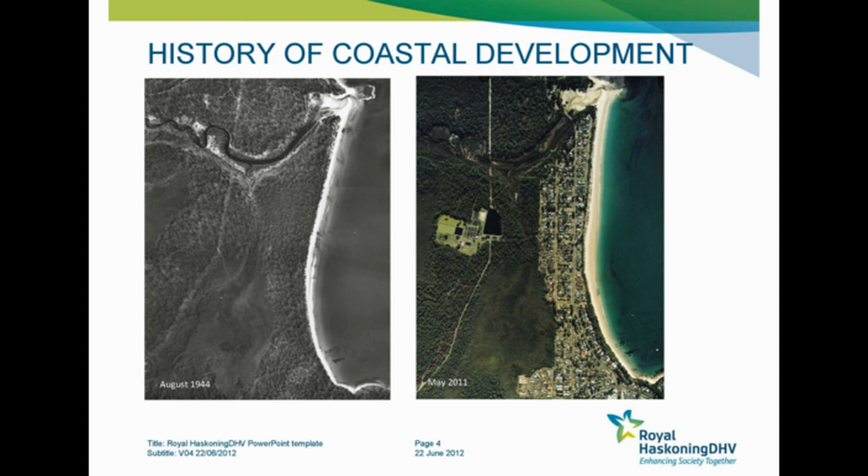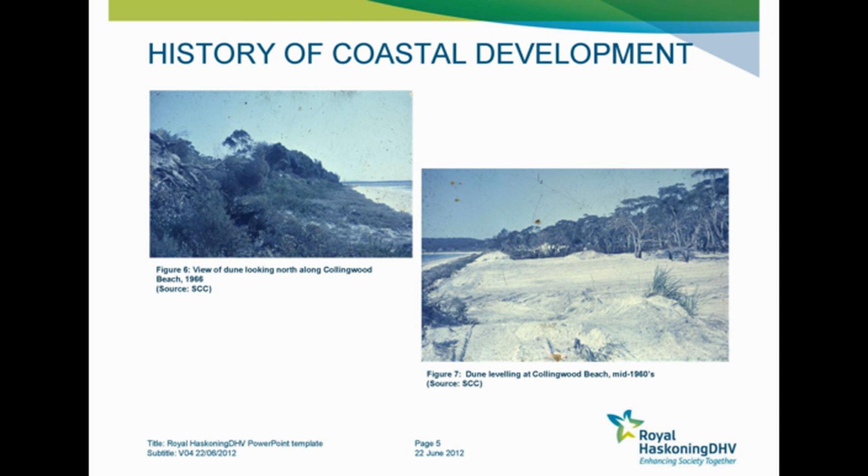Some of the early shots from the community that have been passed on, a view looking north along Collingwood Beach, and just a view of the levelling of the dunes. That was a subdivision going in about 50 years ago. The levelling of the dunes is of particular interest because the dunes really are part of the beach system, as we all know, and levelling dunes, building on dunes, there's little surprise the beach might want to get back into those dunes during storm activity.

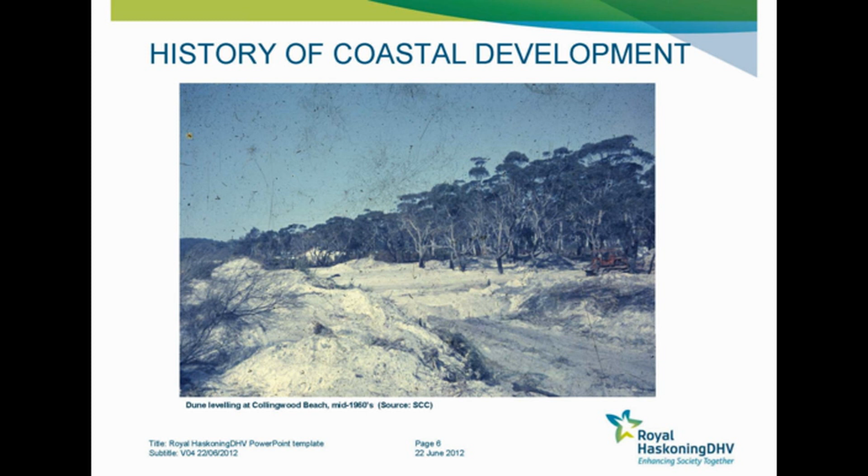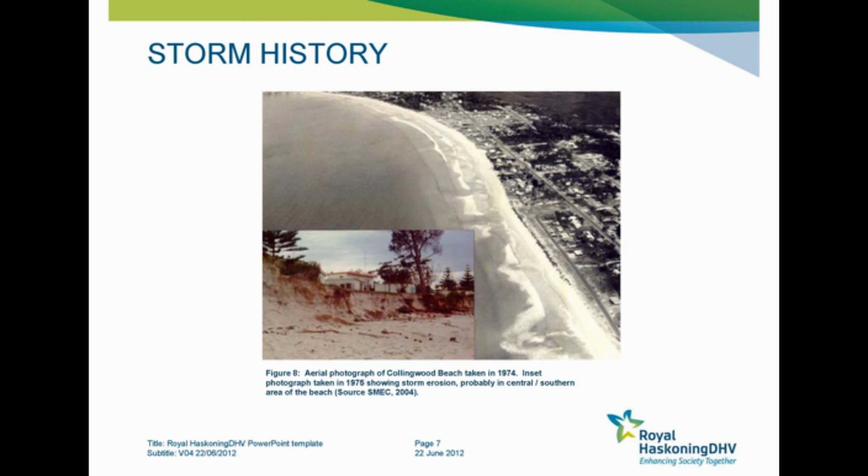Some of the storm history - a photograph that's been reflected in a few of Council's documents. 1974 storms: the inset photo was taken in '75, so that's a '74 shot of the beach and '75 of the erosion, probably in the central and southern areas of the beach, and that was in an early SMEC draft. Another early shot, Davies 1982, storm damage at the southern end of Collingwood Beach. 1977 - there were decent storms in '74, and then '77, '78 - it's fair to say since the mid-80s or so storms have been quite muted.

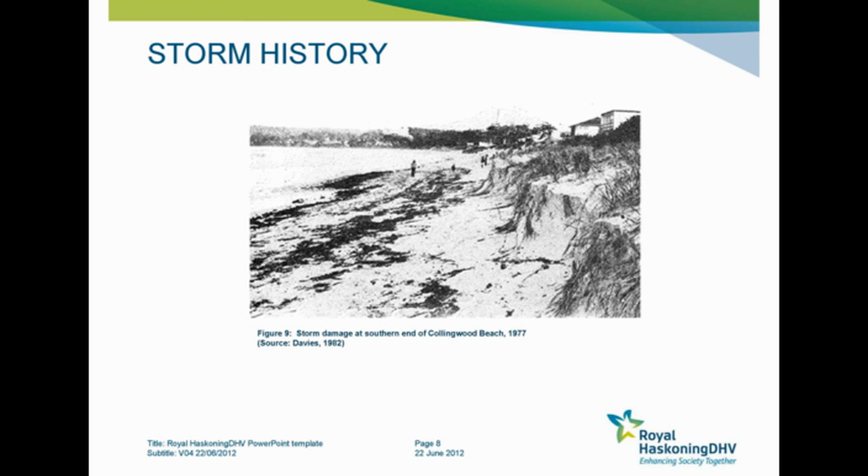A little bit about the Coastal Zone Management Plan investigations. The main ones I'll refer to are the SMEC work done in the mid-2000s, and then later in 2009-10, after the sea level rise benchmarks were brought in and then also withdrawn, and then I'll talk a little about Umwelt's Coastal Zone Management Plan draft.

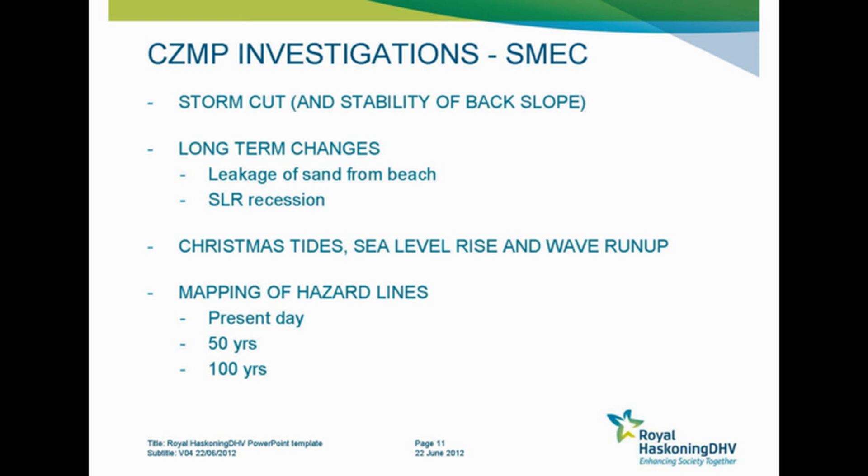What SMEC essentially did was just describe the hazard on the beach, and I'll recap on the work they did in quite simple terms so we can explain what was done. I'll talk to these key points: what a storm cut is and how that differs from long-term changes, talk a little about inundation, what that is, and then the mapping of the hazard lines.

So firstly, storm cut. I really won't be putting up a whole lot of science type slides, but a quick slide. It's of interest to see that there is information on a relationship between return interval, or frequency of occurrence, and wave height.

This is data measured at the Waverider buoy off Port Kembla. For example, what it might say is once every 10 years, we might have a storm which lasts an hour, producing significant wave heights of 7 metres. Once every 10 years, we might have a wave height that lasts for 24 hours of about 5.2 metres.

So if we're looking at a shorter period storm, we can actually get larger wave heights in that storm for given recurrence intervals. It's normally in the 50 to 100 year recurrence intervals that are of interest to us in terms of defining hazard at a beach and also hazard management options. So we're looking at offshore wave heights in the sort of 7 to 8.5 metre range.

What was done previously was some modelling looking at how waves from offshore penetrate into Collingwood Beach. What we've got written on there are the wave transformation coefficients, which is really just the ratio of the wave inshore versus the wave offshore. So at that area, the wave heights would have been about 70% of the wave heights at their offshore point, wherever that was when they did this work.

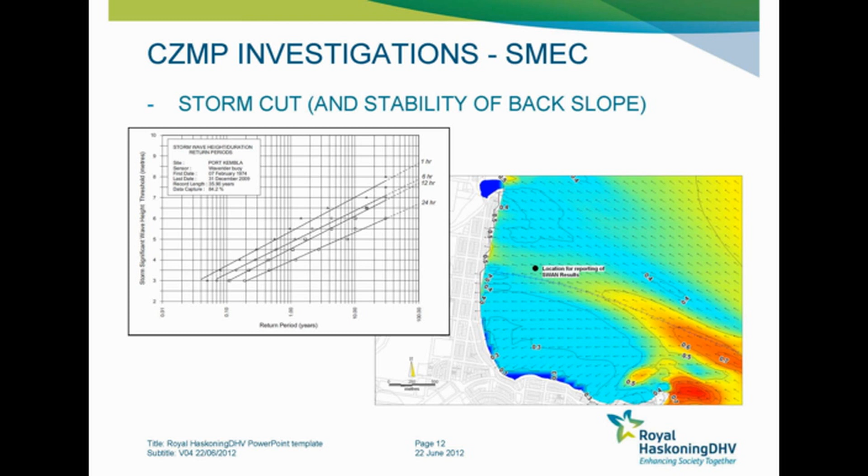If we just have a look at storm cut, what happens in a storm is the beach gets eroded. If we take a slice through that, say that slice was 1 metre wide, travelling along the length of the shoreline, in that slice, in a design storm, it's predicted that 110 cubic metres of material would be in that slice.

Now that is developed from aerial photogrammetry. It's also developed from survey, and calibrated against photographs and also calibrated against some numerical modelling. So the best information we have at this point is that a design storm, a 100-year storm, could potentially erode 110 cubic metres per metre from the beach.

What's also of interest is the slope at the back of that cut, because that affects the stability of the ground immediately behind that, and also that translates to the stability of the foundations further landward.

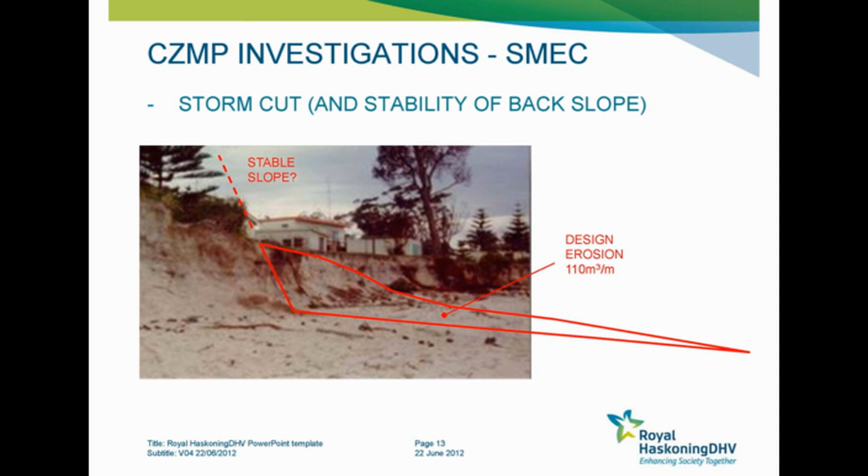I'll just run through a small animation here to help us understand that. This is a situation perhaps before a storm happens. We might then have a storm where the water level gets up, it's high tide, there's wave penetration to the site as per that earlier slide that I showed. And then what happens is, like that last slide, we might get some erosion happening at the beach.

When that erosion happens, you actually get a very steep face at the back of the beach, vertical or subvertical, and it's this area here that might be around about 110 cubic metres per metre. That 110 is actually measured above mean sea level, so wherever mean sea level is, that's a measure of that cut.

Then the storm withdraws and the backscarp dries out. And when the backscarp dries out, it flattens. It's not stable there. If you go to the beach and the tide washes up, you dig a hole. When the sand's wet, you can get a nice steep side to that hole. As soon as it dries out, it wants to flatten out. And that's what that is referring to.

Now, you guys would have seen this wedge failure plane model. It was developed by a colleague of mine, Lex Nielsen. It's found its way into some of the coastal hazard definition work that's been done for council, and it's also adopted more broadly on the coast by the Office of Environment and Heritage. What it does is it simply relates some of those things I was just explaining to areas behind here that have different factors of safety, and I'll explain that in a minute.

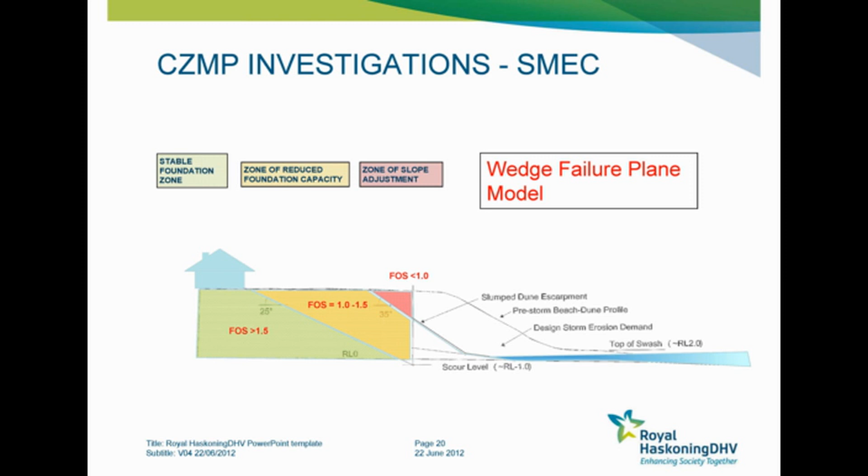If our stabilising forces are 50% more than our activating forces, we're in an area which is, for engineers, considered acceptably stable, and that's in this green zone. So houses there, we'd prefer them to be. Houses over there, we would prefer them not to be. In the middle, also not to be — unless one provides deeper foundations into the stable foundation zone, then that is generally considered to be acceptable.

The lines that Council has mapped are zone of reduced foundation capacity lines. You would have seen that in some of the mapping. That simply is that point there on the model — that's called the zone of reduced foundation capacity. It's been defined as the zone of foundation capacity line on the landward edge of that zone.

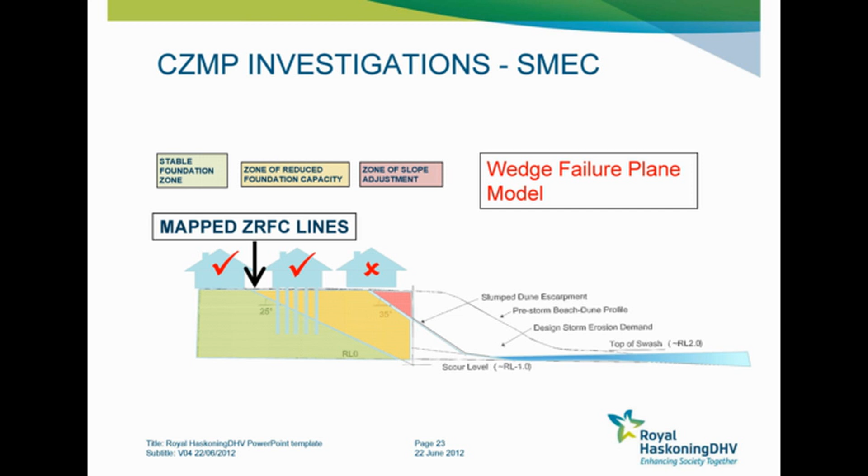Now, after the storm, what happens is we get swell waves, we're back to fair weather conditions, and some sand is brought back onto the beach, and the beach builds up. Now the beach typically, and at Collingwood to some extent, doesn't quite build up to where it was before. There's a small leakage of sand, and that leakage contributes to what's called budget recession.

In a plain sense, what budget recession actually means is that sand, which was eroded from the beach, tends to get lost from the compartment. Some of that sand might move into deeper water, might be sucked out in a rip, and so lost effectively from the system. Some of the sand might move around the headlands, some might be blown on shore, and some might go into, say, Moona Creek. It's fair to say that these losses are quite small at Collingwood.

But just to give you a sense as to what that might mean, over time, as these losses do occur, the profile essentially moves landward to the point where the buffer is reduced. Under sea level rise, in simplistic terms, the buffer is reduced even further. So that there is the concept description of long-term recession due to budget losses and sea level rise.

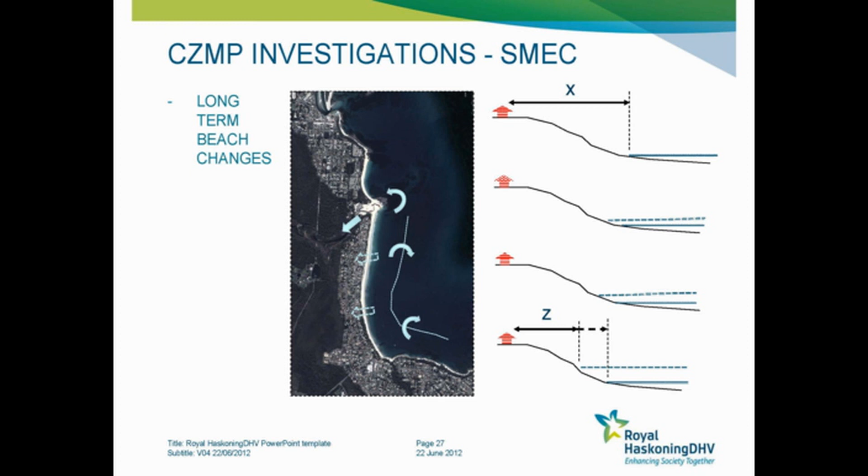If we talk a little bit about inundation, in simple terms, Christmas tides, we all know they get up pretty high. Sea level rise and Christmas tides possibly get up even higher, and that then might lead to, when we have storms, possibly waves overtopping and the water inundating onto coastal property.

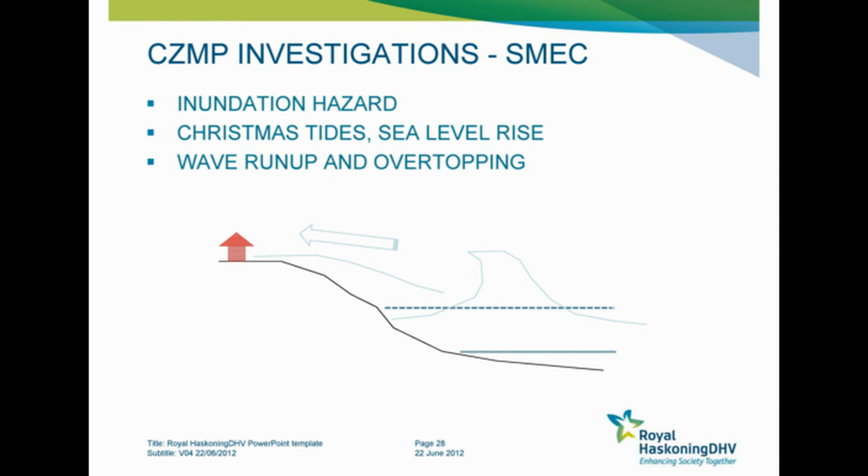That there is a 50-year example. We might have 50 years of recession due to compartment losses and sea level rise effect, erosion from a design storm. Now the design storm is taken to be a 100-year storm, a 100-year recurrence interval storm for all of those particular events. So we take the 110 off, and we go to our map line, which is the orange line.

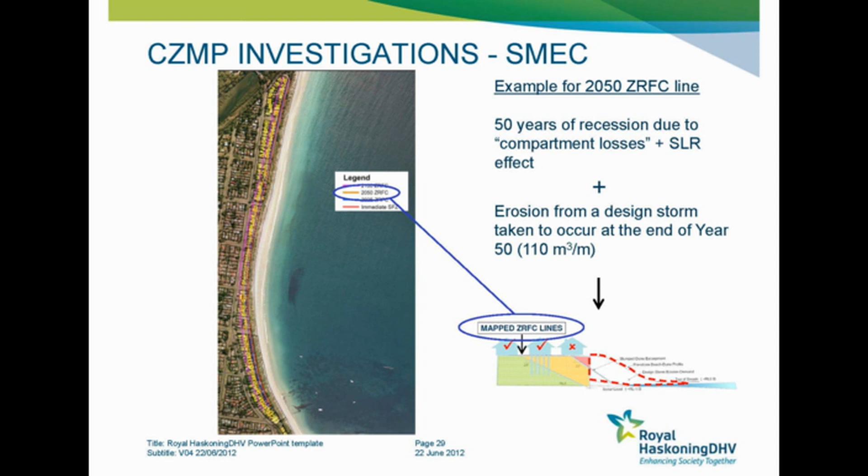Just jumping onto Council's development controls, DCP, interim policy areas of coastal management currently applies and will do so until draft DCP 118 is reviewed and adopted by Council.

In a nutshell, what areas of coastal management tells us is that we have different risk zones which are defined between these zone of reduced foundation capacity lines. The high risk zone is a zone where no new development is permitted, but where minor alterations and fit-outs can occur. The moderate risk zone requires proposals to address standard criteria for coastal instability. So any proposal that's submitted to Council needs to consider those.

If that particular proposal is landward of the 2050 line, generally Council doesn't require any additional coastal engineering investigation. Nonetheless, any buildings in that zone do need to have foundations that penetrate the 2100 zone of reduced foundation capacity line. And by that, all I mean is that your foundations need to get into that green zone.

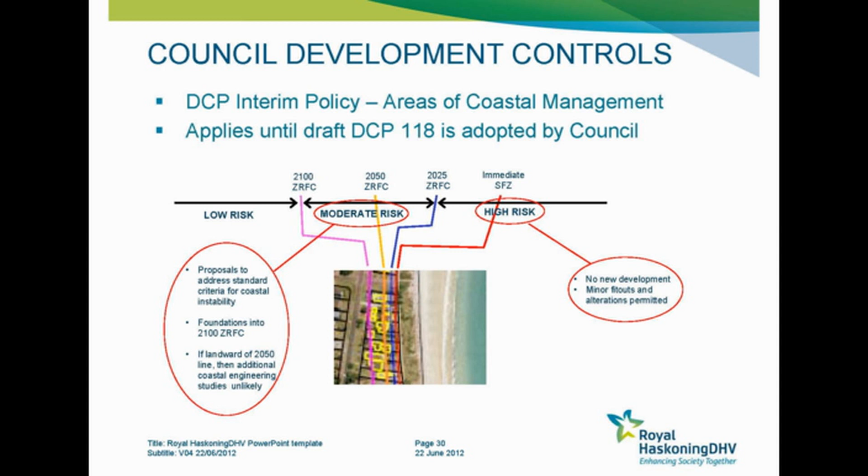So, just recent citywide investigations and work strategies that Council's been busy with. Council has 10 exposed beaches where property is particularly a threat, and they are from Shoalhaven Heads down to Collingwood Beach in the south. Collingwood Beach is but one of the 10 - it's fair to say it's one of the more exposed, but it is but one of 10 beaches that Council is concerned with.

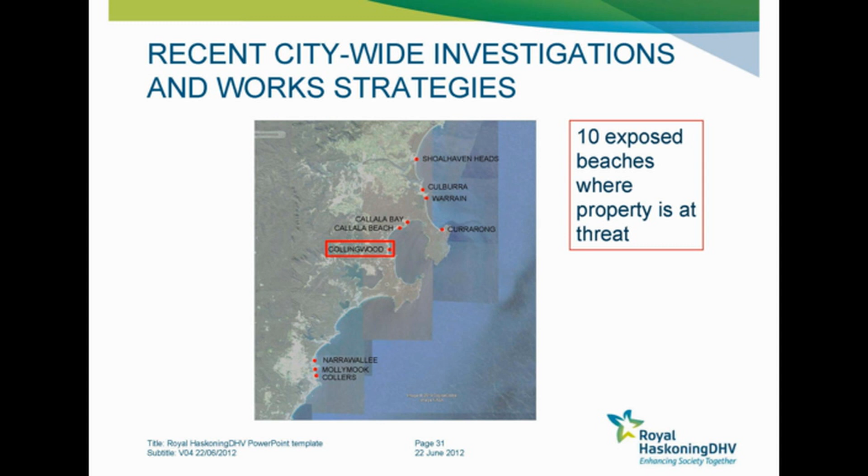The more recent investigations that Council has been busy with on a citywide basis are those asset risk management work done by BMT WBM in 2012, some Sydney Uni work on beach vulnerability, beach scraping advice and application, dredging feasibility work. Spurway and Associates recently produced a final document for Council, and Council is busy at the moment with some sea level rise work on the south coast, trying to understand any regional influences. That's a joint project with Eurobodalla Shire Council. I'll talk about each of those in turn.

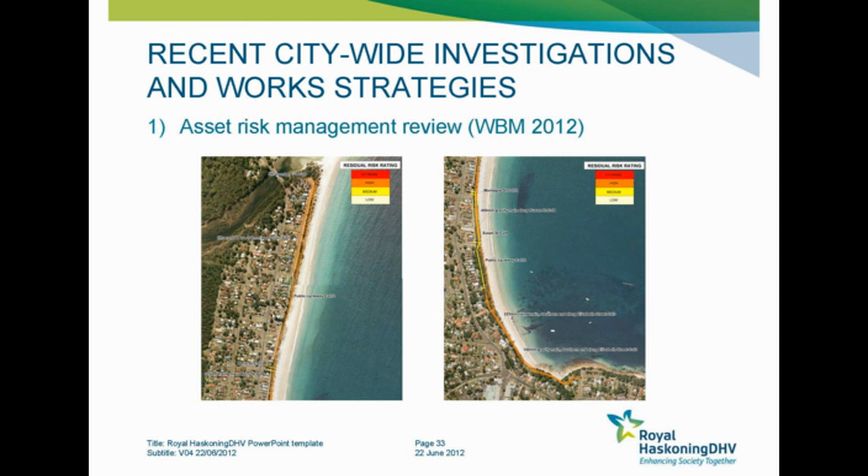Just number one, this was a risk review. It rated low, medium, high level, and extreme risks. Six extreme and high level risk assets were identified for Collingwood Beach: pump station, sewer rising main, cycleway, Ilfracombe Avenue, water supply. Those were assets which were in that high risk and extreme risk category. About $3 million worth of public assets were in that category.

The Sydney University work, this is a little bit more difficult to follow and understand - it's quite esoteric work. It examined the relative vulnerability to sea level rise of, I think it was 8 exposed beaches in the Shoalhaven. Previously we saw 10; I think Narrawallee and Callala Bay were removed from that investigation by Sydney Uni. Vulnerability is a measure of how changes can harm a system, so that's what they were looking at. What they found was that Mollymook and Collingwood were the most vulnerable beaches of all of the beaches in the Shoalhaven.

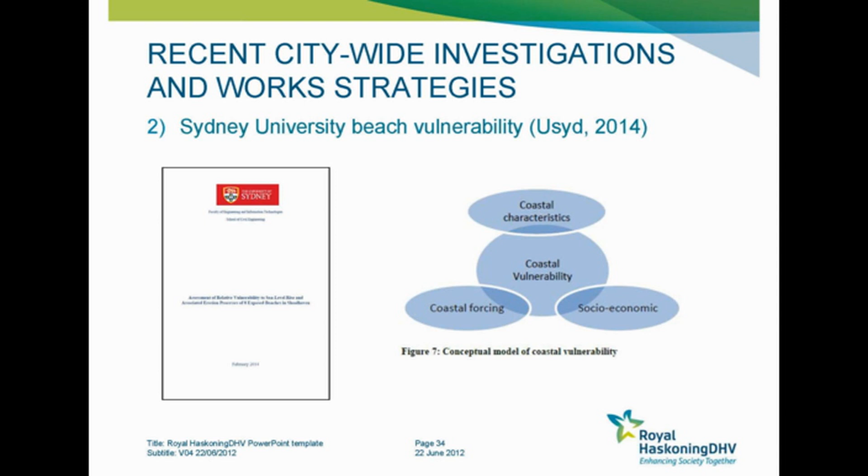Just having a look at some of my notes here on this slide... Collingwood actually was found to have a relatively high adaptive capacity, and by that I think the researchers were saying the age demographic and the income profile of that beach actually meant that residents at that beach were more adaptive and could adapt to a higher extent than perhaps residents at other beaches. I'd really refer you to the report if you wanted to know more about that. Nonetheless, Collingwood was one of the most vulnerable in the Shoalhaven.

Beach scraping advice. What beach scraping is, is a technique for accelerating beach recovery following erosion. It's basically doing what nature would do anyway - it's taking sand which has been washed away from the back of the beach into the swash zone and pushing that sand back to the back of the beach. What it does is it allows the energy of the sea to bring additional sand onshore quicker, which speeds up the rebuilding process. Nonetheless, it's a very short-term benefit. We see it as mainly an amenity benefit rather than a protective benefit.

This is an example of a beach scraping exercise at Callala Bay in 2003. Here's the work done in 2003, implemented there at a cost of around about $150 a metre. Two years later, it's all washed away. So you would say, was that worth it? I'll leave that up to you to decide. I mean, there was clearly an amenity benefit. It was unfortunate that the storm arrived as quickly as it did, so it's certainly not a panacea. It's not going to help protect your property even in a moderate storm. But if you have a hiatus of storms and don't have any, then clearly you've got a better amenity.

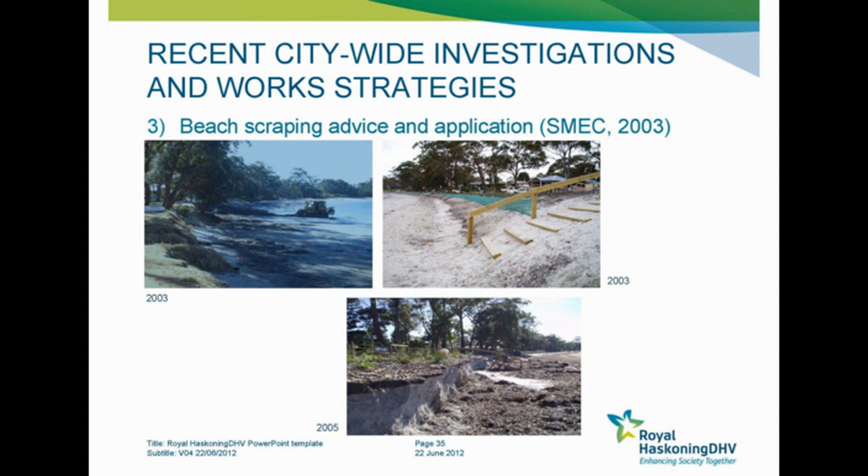Dredging feasibility study by Spurway and Associates. What it did, it looked at strategies to deal with demands for improved navigation - that was the basis of that work. It targeted clean deposits at estuaries, estuary entrances, and also at boat ramps. What it found was that at boat ramps, potentially there could be about 5,000 to 10,000 cubic metres of sand which could be cleared from those boat ramps, and that sand might be available to perhaps do something on beaches to protect beaches.

In a larger sense, say at Lake Conjola, where we have very large entrance shoals, potentially 50 to 70,000 cubic metres of sand might be available there. At Currambene Creek, we might be looking at something in between those numbers. I'd refer you to that report, which is on the website, if you wanted more information.

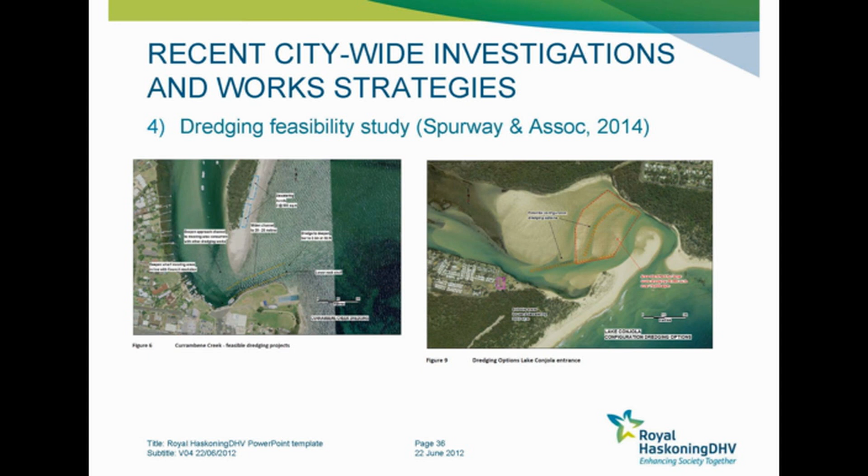The fifth and last study that Council's still busy with is a South Coast Regional Sea Level Rise Planning and Policy Response Framework, that's what it's called, the jargon. It's a joint Shoalhaven-Eurobodalla project, to inform coastal planning within these two LGAs.

And what we can see here is it's been a little bit all over the place, but we see a general trend of increase in water level. And I think what's particularly concerning to scientists is the increasing rate of increase in recent times.

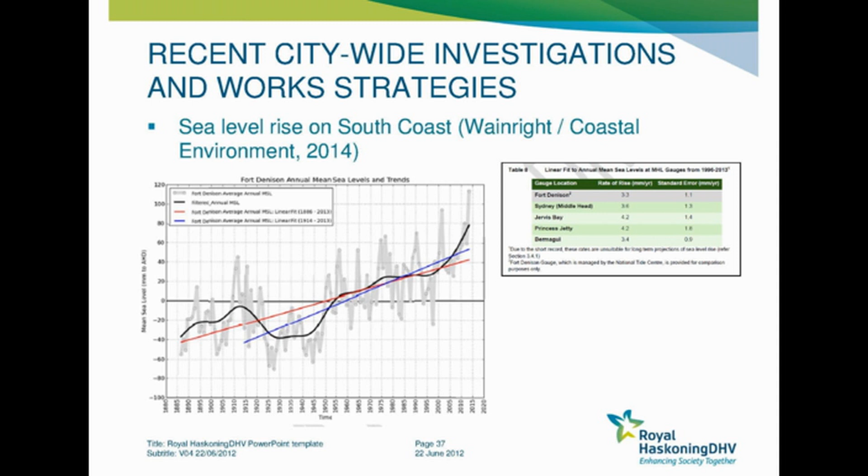What I should also add is that in about 1930 or thereabout, there was a datum shift at Fort Denison, and there's a little bit of uncertainty as to how you compare numbers on this side of 1930 to that side of 1930. But nonetheless, it doesn't affect what we see from there.

Over the last 20 or 30 years, say 20 years, from about 1990, at Fort Denison, water levels have been rising at about 4 millimetres a year. And when we do our coastal hazard assessments now, we actually have to take that 4 millimetres per year into account when we interpret long-term recession.

So that's just data, that's hard facts, what's been measured. The predictions are of more scientific interest at this point, and that is where does this trajectory maybe go from here.

Those there are the benchmarks, which were issued in 2009, I think it was, by the state government. They were then withdrawn on the basis of advice from the chief scientist. Councils, unfortunately, were left with the baby, and they had to make their own decisions. And all the advice that council has been getting to this point is you really can't be moving away from that.

So that's kind of council's bind at the moment. And I think this particular investigation is going to that very thing, trying to understand what is actually happening in a regional sense on the coast here.

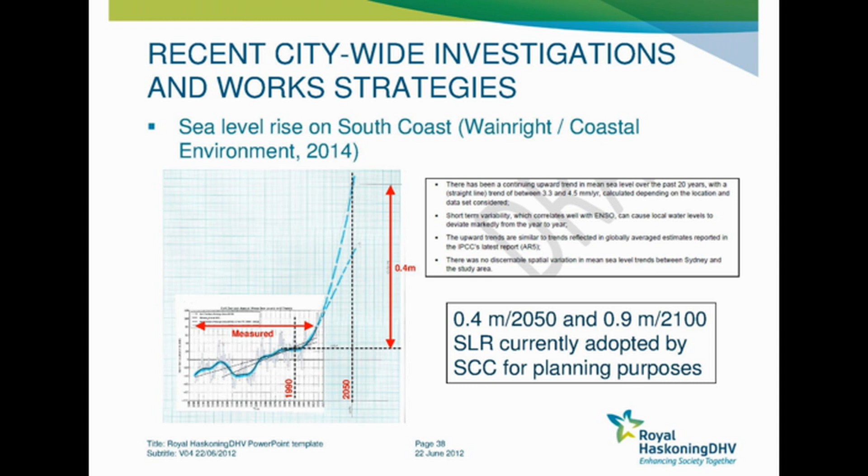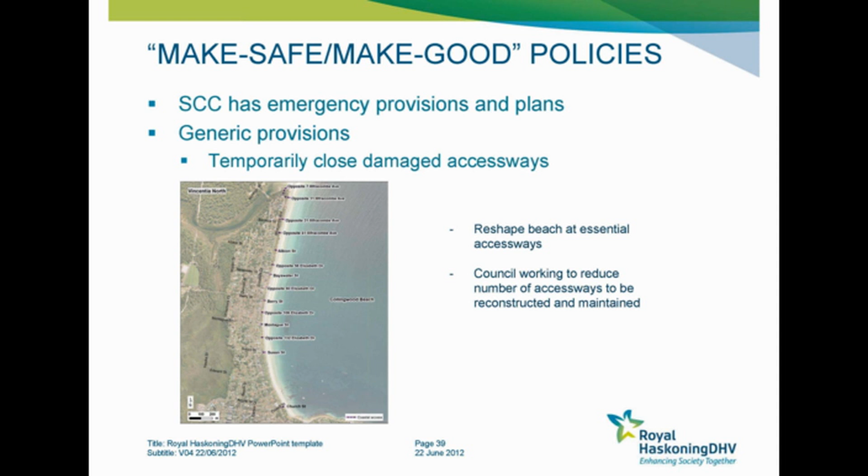Council has in place some emergency provisions and plans. It's got a coastal emergency sub-plan for all of its key beaches, including Collingwood, and they also have an asset management plan for coastal and estuary assets, which is a separate internal document that Council has.

And these plans allow Council to implement these sorts of provisions, to temporarily close damaged access ways, to reshape the beach at essential access ways. And what Council, I think, is wanting to do at a number of its beaches is rationalise the number of access ways that exist, particularly private access ways.

When you've got a private access way that gets damaged in a storm, clearly it's not a high priority access way for Council to go back and reshape. It'll go to the public access ways before it goes to the private access ways. But that, I think, is quite a maintenance bind for Council, which they might want to talk to afterwards.

Some of the other things that Council does in an emergency sense, clearly it's monitoring things and it's implementing beach scraping as necessary.

At Collingwood Beach, SMEC in 2011 identified nearly all beachfront property at the beach as exposed to coastal inundation during a design storm. Now, a design storm, we're talking about a 100-year storm. The last time we had a 100-year storm was in 1974.

Now, you'd say, was that a 100-year storm? Who knows? Maybe it was a 50-year storm. Anyway, it was a very big storm. When we see these red areas versus the green areas, what does that mean? What that means is that these red areas here are predicted to experience overtopping, which is water coming over the dune and possibly washing landward.

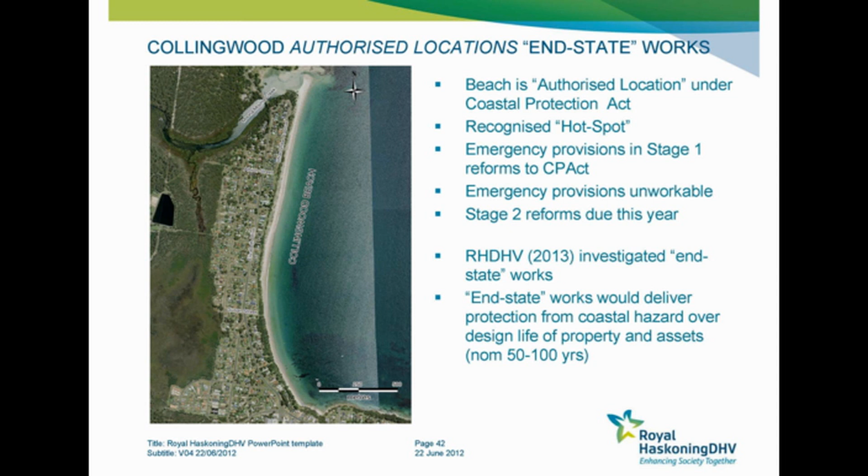We investigated these end-state works in 2013, and as I said, an end-state work is designed to deliver protection from coastal hazards over a 50 to 100 year life, over a property design life, whatever we might want to select for that design life. When we initiated our work, one thing we wanted to do is see if we could find any resistant material to erosion on the beach.

We didn't have an enormous budget. We had to go to 3 beaches. At Collingwood, we picked a couple of locations along the beach and drove in these rods, 4 metres into the sand. At each of the locations that we drove them into, we didn't pull up on anything that we would call erosion-resistant material.

This here is a measure of level in AHD versus the number of hammer blows that you drop onto the top of that rod, and the number of blows to get 100 millimetres of penetration is plotted against level. As the rod actually penetrates the sand, you can see it takes a greater number of blows to get your 100 millimetres of penetration. Numbers of around about 40 blows per 100 millimetres is considered to be refusal, and we weren't getting there clearly.

So we were getting 4 metres of penetration from a spot which might have been just above the water line on the day, without any real sense of resistance. And what that means is that we really need to be treating this whole profile as potentially an erodable profile, based on this limited scope of work.

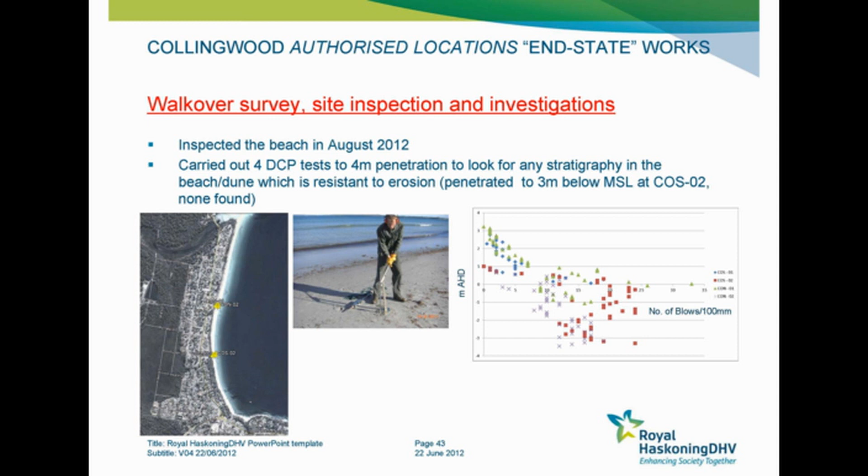I mean, you might want to go over here, you might want to go over here, and it's fair enough that we go all over the beach if we want to firm up on these things.

What we did with our work is we divided the beach into 3 precincts. These were just based on relative exposure, relative risk, and picking key streets to help us with this.

The sea level rise recession effects are based on the best technologies that we have at this point, which is called the Bruun rule, and they're also based on the benchmark numbers, which Council is now going back and having another look at.

Some of the wave run-up levels, 5 to 5.5 metres above Australian height datum. That's pretty close to what you have on top of the dune there now.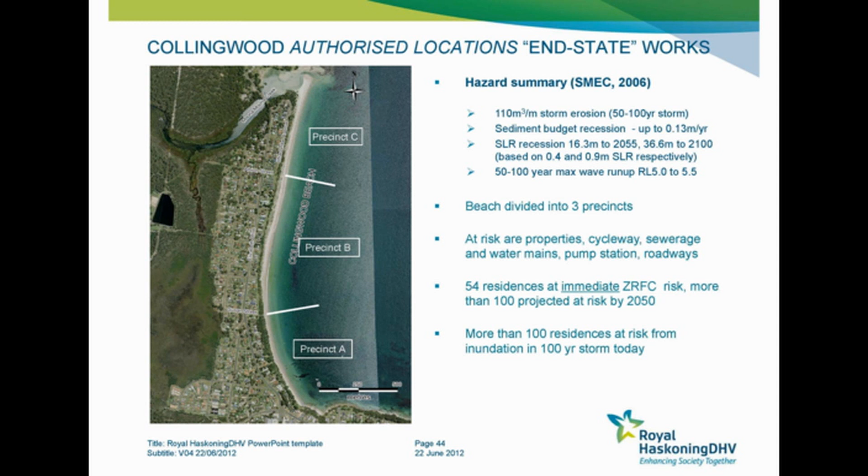So, what can we do to try and mitigate these risks? We looked at revetments, beach nourishment, and also near-shore breakwaters.

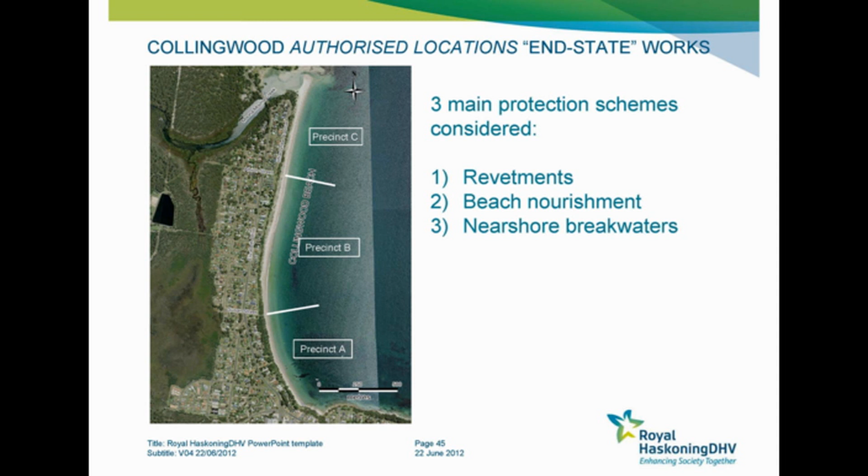What revetments are is they're shore parallel structures. They physically interrupt the wave action. And what they have the effect of doing is they have the effect of moving a hazard line basically to the crest of the revetment. So that's a slice through the beach, through the dune.

We separately looked at those for each precinct, developed that design based on a breaking wave height of 2.3 metres, which we got from the 2006 work.

Concept design involves 1.2 to 2 tonne rock over an underlay. Often you see a bit of a toe in front of these structures because the beach is relatively protected. That's a relatively small breaking wave height. We believe that that might not be needed at this site.

Crest level 4.5 to 5. To build that is about $10,000 per linear metre.

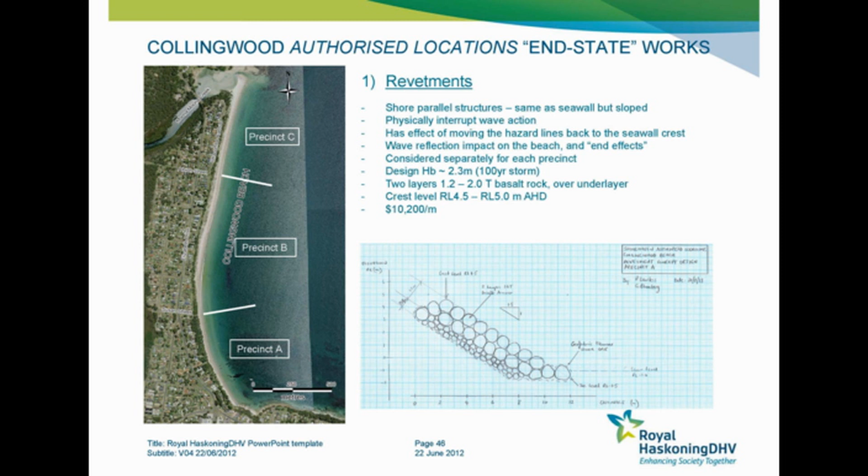Beach nourishment, that's putting new sand on the beach to feed the ongoing erosion. We characterised how much sand might be lost in a storm, how much sand might be lost due to long-term recession.

If you keep putting sand on the beach to feed the recession and feed the storm, essentially you can hold the shoreline in the same position. That's all beach nourishment is. You can imagine that for 50 years of protection, that amounts to a lot of sand. And I'll talk a little bit more about what quantities are involved.

3 nourishment scenarios we looked at. We looked at what we call massive nourishment. Nourishment with the groyne near Susan Street, which allows us to compartmentalise an area of nourishment and not focus on areas which are relatively protected.

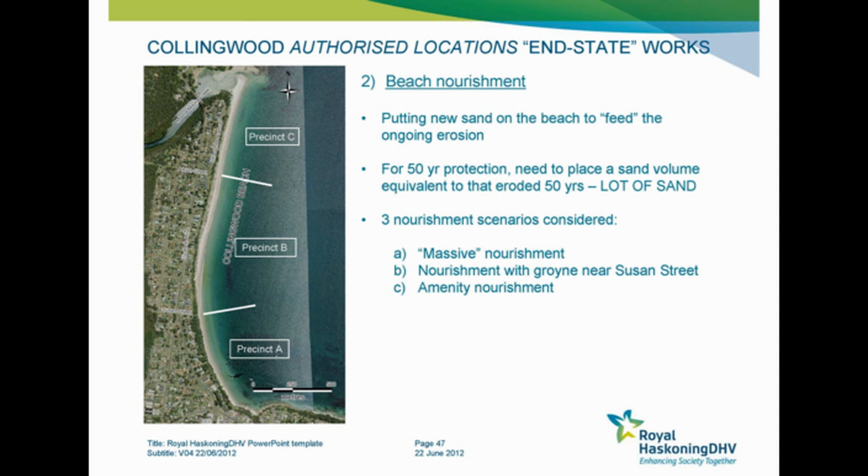And then amenity nourishment, which is basically protecting the beach more so than protecting property, but I'll talk about that as well. So going to massive nourishment.

Massive nourishment does the job of a full-length revetment. It needs an initial placement of sand plus ongoing maintenance placements. And you'll see that we're talking about very large quantities of sand. And it's not just about putting sand on the beach, because if you put sand on the beach, that sand

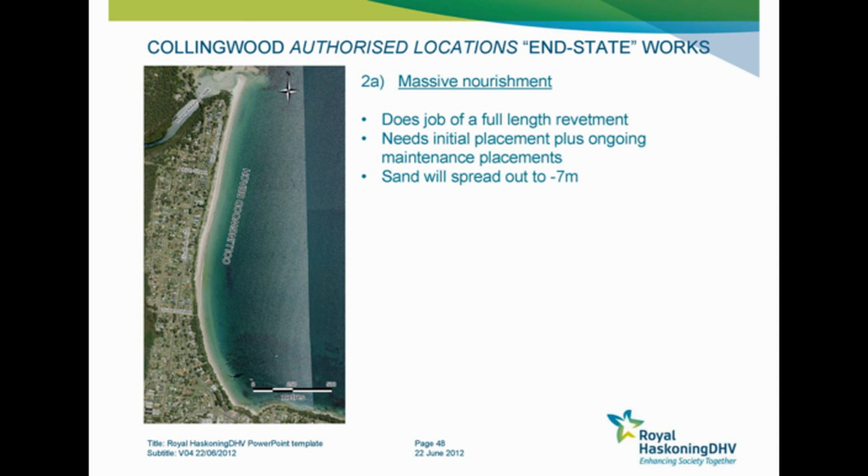very rapidly gets washed into the swash zone and beyond. We need to actually get that sand out to a depth which is called the depth of closure for a beach. And that's characterised here.

So that, if you like, is the compartment within which sediment might move. In effect, the best way to nourish a beach is not just to put sand over there, but put it over the whole profile. Now, what you'll see is that 60% of the sand you need for nourishment is actually underwater, you don't see it. This is the depth that you see.

At Collingwood, a massive nourishment project would require a 10-metre widening of the dune, with sand placed all the way up to -7, and there are techniques for doing this. You would need 250,000 cubic metres of sand. Now, that's a lot of sand.

So inside this room we might have, like 10 by 8, that's 80 by 3, about 200 cubic metres. 250,000 cubic metres means we're talking about 1,000 times the amount of sand that's in this room. So it's a lot of sand.

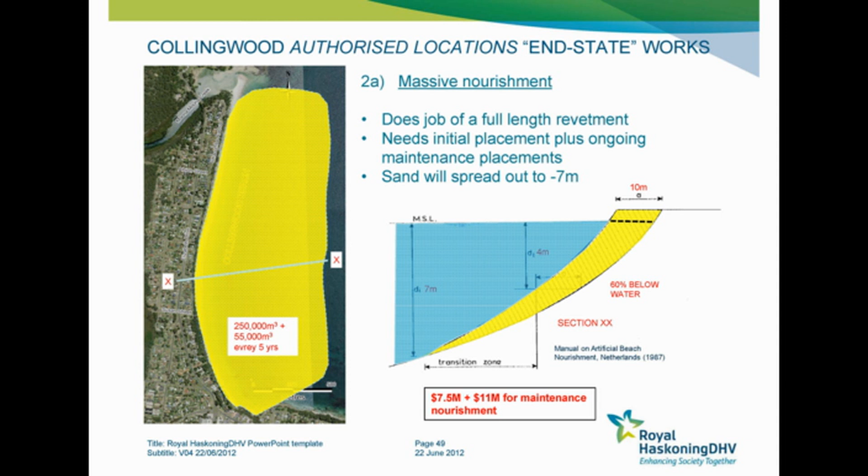If we were to consider a groyne at Susan Street, that in itself is a substantial structure. That's a 200-metre long structure, and it needs to be that long because if it's shorter, the sand we'd like to compartmentalise over here starts to leak and not work for you over here. So it has to go out to a point where you're minimising that loss of sand from the end of the groyne.

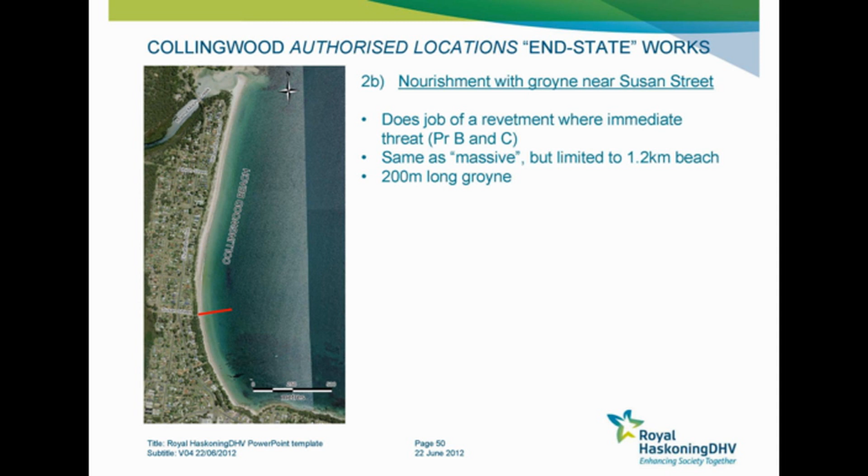It does the job of a revetment where there's an immediate threat. So that's what this particular scheme does. It's the same as massive nourishment, but it's limited to 1.2 kilometres of beach north of Susan Street with a quite substantial groyne. What you can see here is you're bringing down your numbers, but they're still substantial numbers, and that's not allowing for the construction of the groyne.

It's another $5.6 million to construct the groyne, and that groyne would require 20,000 tonnes of rock. We're talking about substantial structures, bringing in that amount of rock, which you have to do for your revetments. It doesn't matter what rock structure you're talking about, they're substantial quantities of material.

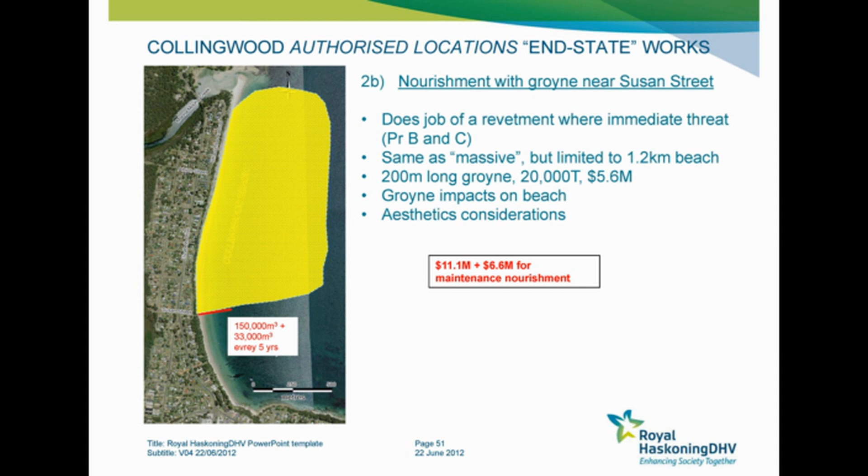Groins, you don't see too many of them around. There are some trial groins up on the Sunshine Coast. I can't think off the top of my head where else we might have one. In New South Wales, inside some estuaries we have them. There are some groins in Swansea Channel, and there's one up at Noosa.

Amenity nourishment is really an adjunct to a revetment. So what this is about is preserving amenity beach width. If you build a revetment at any point on the beach, eventually that beach is going to be lost with sea level rise.

So to maintain a beach in front of that wall, you would need to place sand on that beach. Now at the moment we've got about 25 metres of width between your veg line and your mean water line on the beach. Preserving 25 metres might just be a luxury - if we were prepared to accept a lesser amount, we might need only commence our amenity nourishment in 2034, after the beach has proceeded to that point.

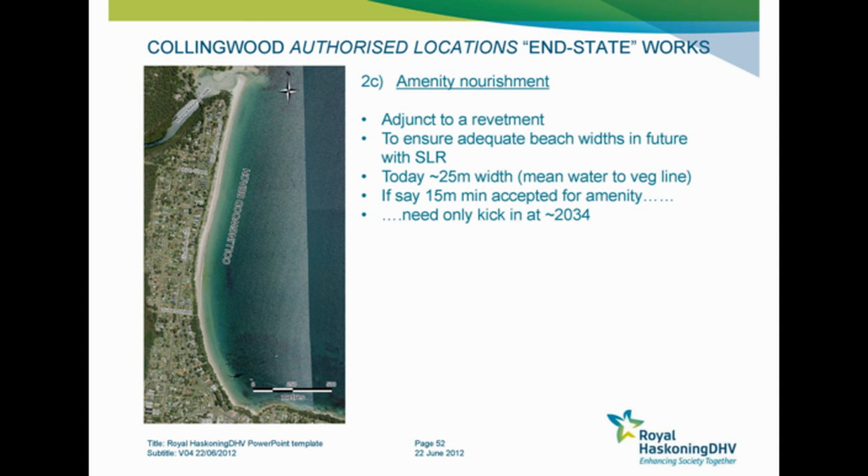And that would then require us to be placing 50,000 cubic metres of sand every 5 years, up to the end of the planning period, which is taken to be 50 years from last year, so up to 2063. That's $4.4 million. So amenity nourishment doesn't provide full protection to property and assets - it simply gives a suitably wide beach for recreation after walls are built.

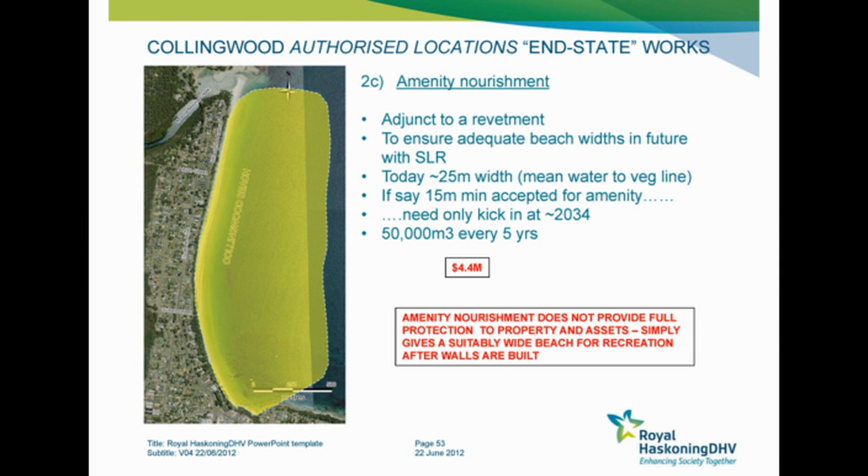Where does the sand come from? Where can we get sand for these sorts of projects? There are three possible sources: commercial, local estuaries, or offshore.

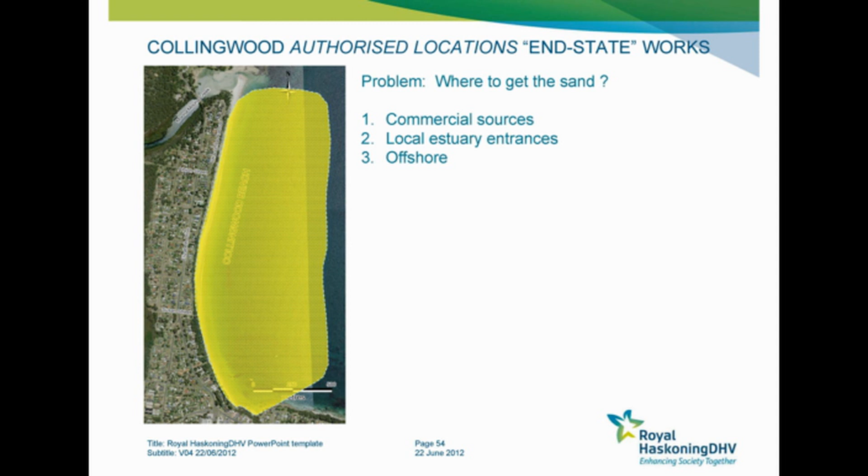Commercial sand costs about $50 a tonne. If you find suppliers from Shoalhaven and elsewhere, it's $75 a cubic metre. For that amount of sand for a massive scheme, you're looking at $40 to $60 million for an end state scheme. Clearly not viable.

Local estuaries: the Spurway report talks about potentially 50 to 70,000 cubic metres being released, mainly in these large entrance shoal areas, more in Conjola than Currambene, over 50 years. You'd still need 10 times that amount to feed a viable nourishment project at Collingwood. So from throughout the Shoalhaven, what can be released at boat ramps and estuary entrance bars is going to be far less than the 10 times you need to feed some of your nourishment projects. So again, not viable.

Offshore as a source: there are vast quantities of sand on the inner shelf, about 5 kilometres offshore, in 20 to 70 metres of water. These have been investigated on a number of occasions by others. You can potentially extract those quantities and place them for around $30 a cubic metre. Still very expensive—even if you halve these numbers, you're still talking about lots of money. Another hitch is offshore extraction is prohibited in New South Wales under the Offshore Minerals Act 1999. There's so much pressure for sand for these sorts of projects, and also for building, that it's likely the state government will be reviewing that sometime soon.

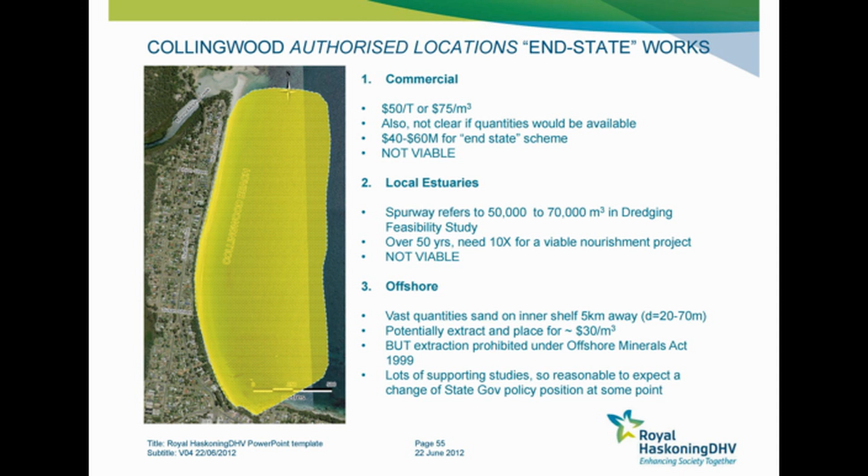So, concluding remarks on dredging. Feasibility of nourishment to provide end state protection is limited by the viability of sand sources and cost. A compartment scheme with a groin at Susan Street also requires large quantities of sand, plus risks—we're less certain about groin performance, and there are major approvals issues in the marine park. Amenity nourishment is a valid scheme to complement end state works, but we still need large quantities of sand, about 3 to 5 times what the estuaries can give us in the Shoalhaven.

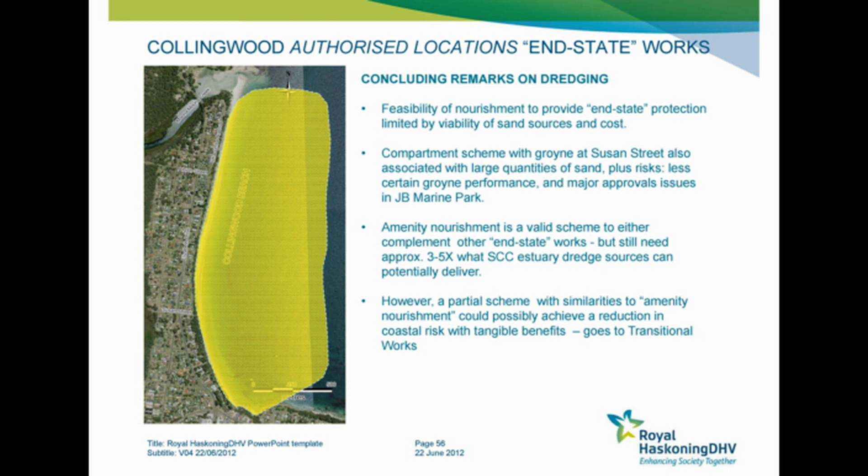However, a partial scheme—getting now to our transitional ideas—with similarities to amenity nourishment could possibly achieve a reduction in coastal risk with some tangible benefits. I'll talk a bit about that now. This was the last of our end state works that we considered: nearshore breakwaters.

Nearshore breakwaters are a legitimate form of coastal protection. They've been discussed up at Old Bar, and applied on the Gold Coast, but those two applications involve a structure with a crest below the waterline. As soon as you have a crest below the waterline, these structures don't work particularly well—they really need to be emergent. They're detached, shore parallel. The sand must be available for them to function; if there's no sand in the system, they don't actually work, because you need sand to accumulate there, and that sand's got to come from somewhere.

We had a look at a possible scheme for Collingwood. Each structure would need to be 200 metres long, with 100-metre gaps between them, located about 200 to 500 metres from the shore. There are some rules of thumb for these types of structures, which would clearly need to be investigated if pursued. Five of those structures might be required for precincts B and C. Precinct A could delay application because of its relative protection. Another two might be required down the track, delayed to 2050.

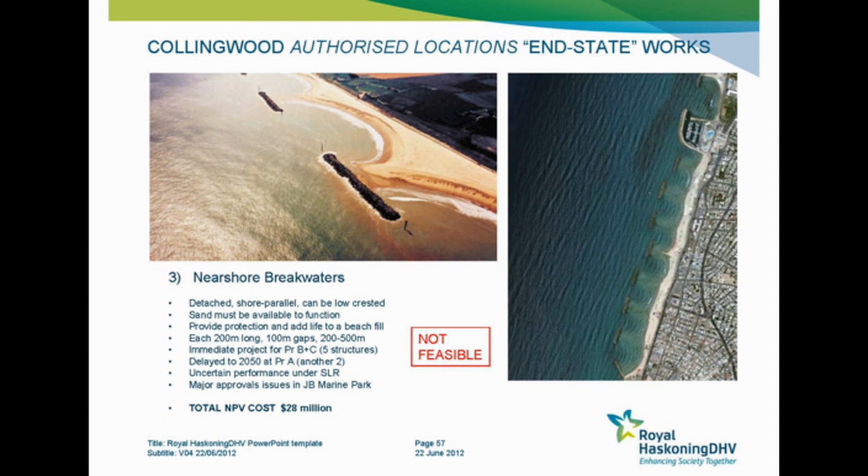The end state works report that we prepared looked at all of these options and said, okay, well, what would we suggest as a priority set of projects to deal with the coastal risk at Collingwood Beach? And we developed 5 projects.

We weren't particularly mindful of dollars here. What would we do? And what we said we would do is, firstly, we'd relocate the sewage pump station and the mains along the southern end of Elizabeth Drive. We're talking about pump stations and mains, getting those away from the shoreline.

We'd relocate the mains along the road heads, Susan, Montague and Berry Streets, pull those back.

A revetment to protect Ilfracombe Avenue was our 3rd priority project. Here we've got a road, we've got a water main, and that road is particularly threatened. That road services a lot of property. $4.5 million to construct that.

Then we're talking about a revetment to protect all shorefront properties between Susan Street and Albion Street. A 900 metre long structure would be our 4th project, $7.9 million.

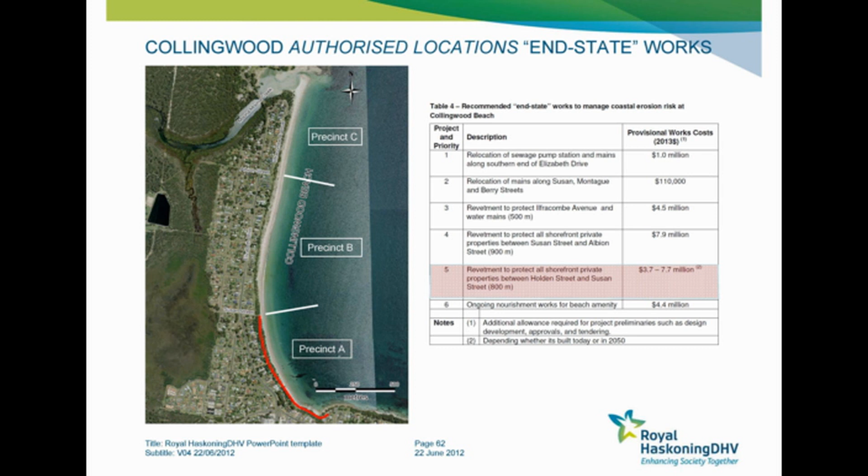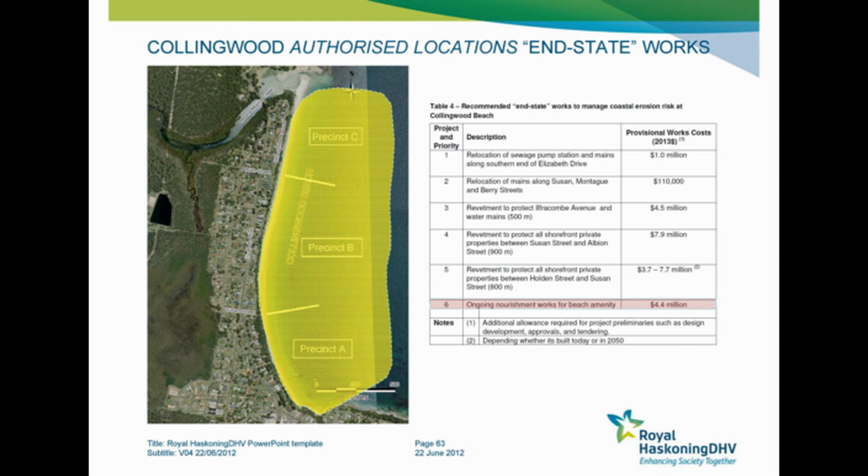And finally, a revetment to protect shorefront private properties between Holden Street and Susan Street, which would only be required in about 2050. So the present value cost of that structure is actually $3.7 million. And finally, if we build revetments, what we should also be doing is putting sand on the beach to protect the beach - $4.4 million.

So clearly lots of money for those schemes. What other ideas might we have? This is really the challenge.

Government's in a bind now. Make good, make safe schemes are in place. They deal with emergencies and minor storms, but they do not manage larger storms or recession. End state schemes have been conceptually described, and at this time we would probably say that they're not feasible and/or they're unaffordable.

Transitional schemes attempt to bridge these 2 bookends, if you like. Just in general terms, what might transitional schemes embrace?

They would want to be adaptive structures. So conceptually you might build for short-term loads and modify if predicted long-term loads eventuate. We have to be careful, obviously, because if we build for short-term loads and we get a mother of all storms and we lose our structure, then we're back to square one. So we have to be very careful how perhaps those sorts of structures might be.

I'll put a few ideas up. Monitoring, we have to monitor. We don't know when to adapt something if we don't monitor. Setting triggers to implement adaptive works, that has to be part of the project.

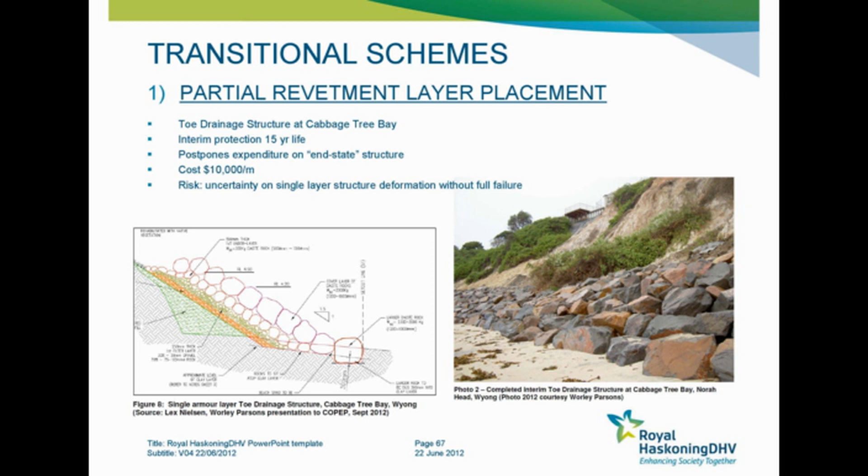One other idea worth looking at is this conventional type of revetment. What we've shown for Collingwood might not have a toe, but the concept is valid. If that structure wasn't there and we had a storm, we might lose material back to, say, that point, which is a hazard line. Your zone of reduced foundation capacity hazard line might be there, but your zone of slope adjustment hazard line might be there. So it's effectively a hazard line.

If we built perhaps part of that structure and satisfied ourselves that part wouldn't get washed away, as a stage 1 to a full project, what we can actually show theoretically is that just by building that, the hazard line can be moved from there to there. So there's potentially a staged implementation of a wall which might take a hazard line away from harm's way from some buildings. If in the future sea levels start to rise and the hazard is increasing and we need to respond, we then might finish that wall. So that is an idea.

Nonetheless, just to go out there and build that would still cost a substantial amount of money. You still have to dig a hole, placing this material down 2 metres or 1.5 metres below mean sea level. There's dewatering to deal with. It is an expensive part of the structure.

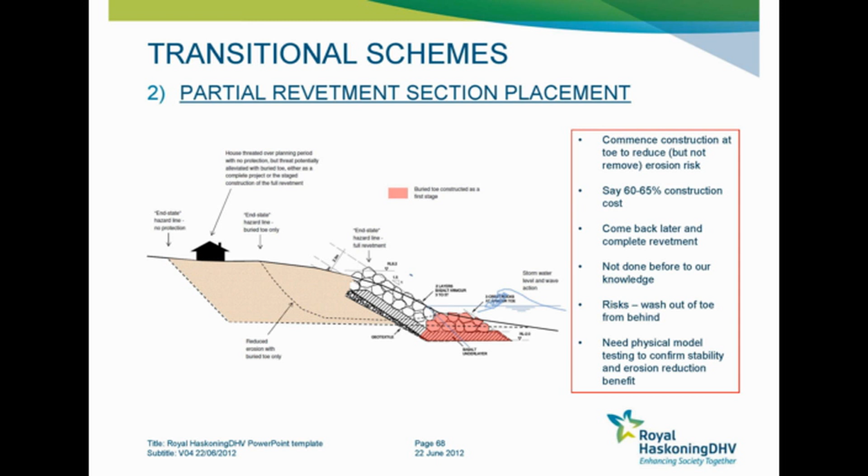To prove that up, you would have to physically model it. You would have to demonstrate that by building that, you got that benefit, and by building that and exposing it to severe storms, you weren't washing out the back of that structure. So those are ideas just to deal with revetment structures.

Backpass nourishment is an idea that I'll bring to you because there is potentially an application, I think, at Collingwood. What backpass nourishment is, is about taking sand that, after it's eroded from your beach, goes to a certain point, and bringing it back to your beach. So simply taking it from its destination and bringing it back to the beach.

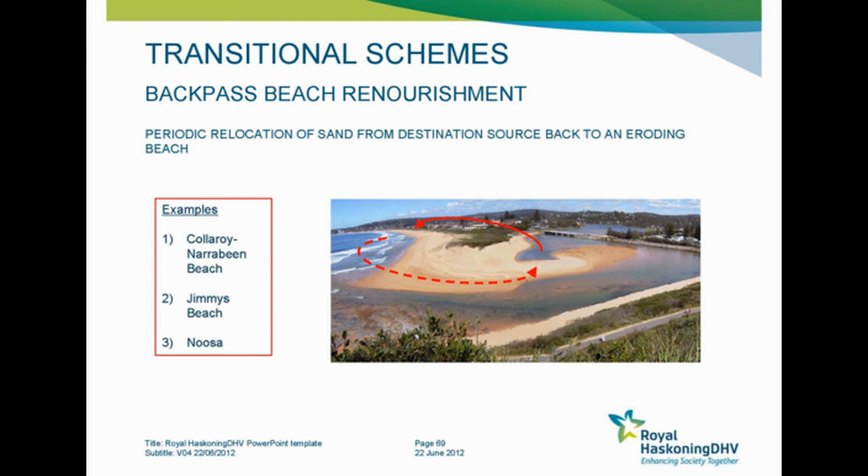Now, this is done at a few beaches - Collaroy-Narrabeen, Jimmy's Beach and Noosa - and I'll quickly go through those. At Collaroy-Narrabeen, what they do is remove sand from the entrance to Narrabeen Lagoon about once every 3 to 5 years, and they truck the sand around through roadheads and put it on the beach. That sand then works its way naturally back to the entrance and refills it. They relocate about 15 to 20,000 cubic metres of sand.

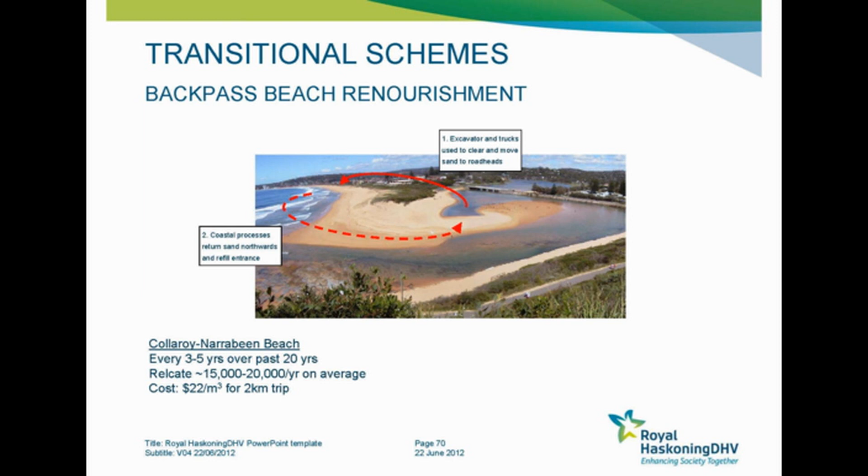Cubic metres of sand on average, and the cost to do that is about $22 a cubic metre. They've been doing that for about 20 years or so. These quantities here are not going to help you - they're not going to protect you in a storm. They're going to assist, they're going to reduce your exposure, but they're not going to fully protect you. So that's the thing to bear in mind. That's the case at Collaroy-Narrabeen.

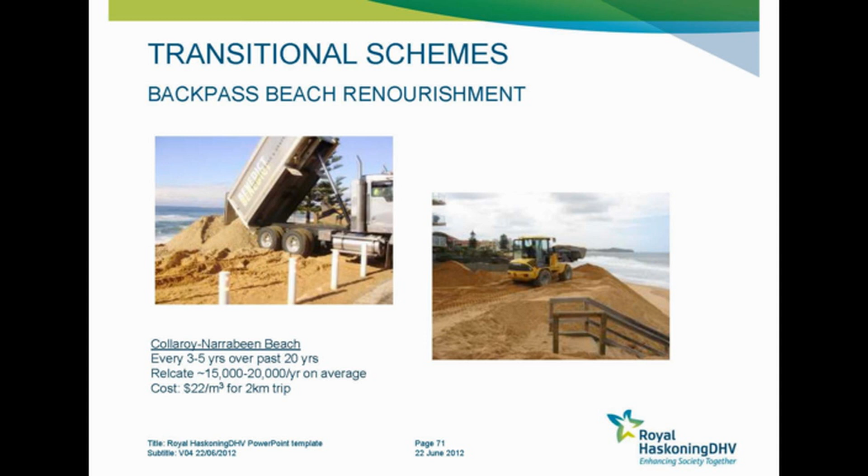That's placing at the roadhead, so you can imagine something like that perhaps being done from some of your roadheads. At Jimmy's Beach, we've got about 500 metres or so of shoreline which is very exposed. There is a road between the beach and the properties, a bit like Ilfracombe Avenue. What council does there is it takes sand from Yakaba and puts it back on the beach. That sand is then eroded from the beach and goes back to Yakaba. So the idea is to set up a sustainable loop.

The difference between this site and Collaroy-Narrabeen, and also Noosa which I'll show you, is that this scheme here actually provides end-state protection for Jimmy's Beach. The quantities of sand that are replaced at Jimmy's Beach actually feed erosion in a design storm, and they feed recession. So it's an end-state scheme for Jimmy's Beach.

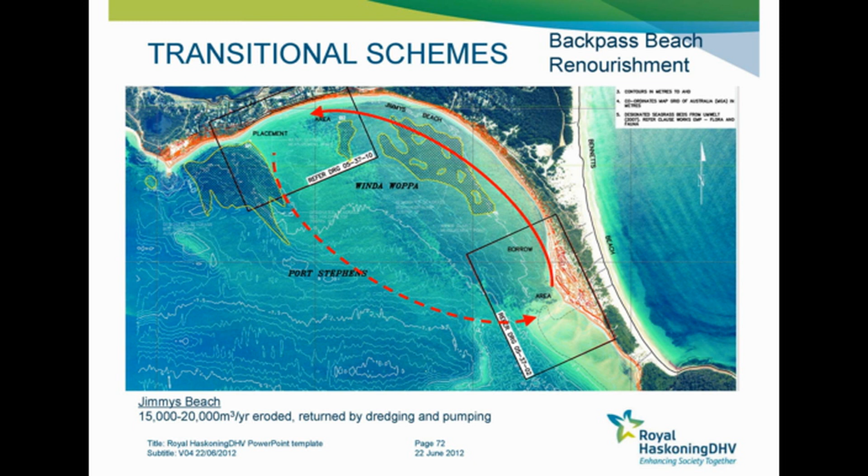At Jimmy's Beach, they've installed a permanent pipeline, and they use a cutter suction dredge at the Yakaba Borrow site.

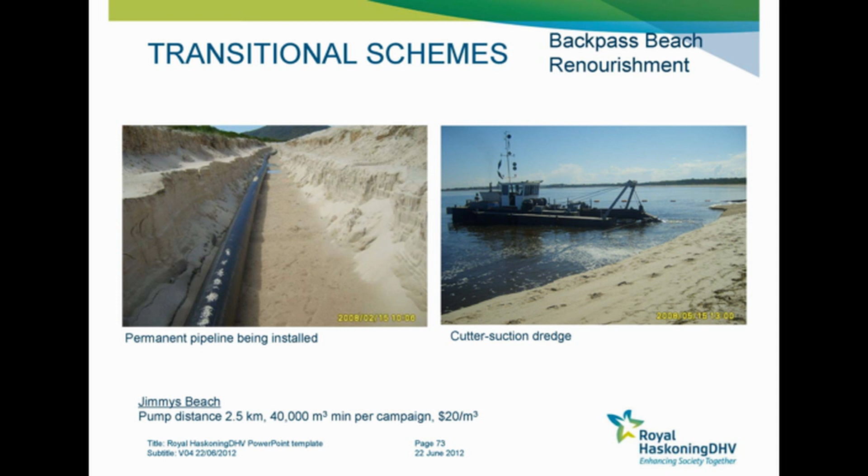The scheme here is called a slurry system scheme. There are intakes below the sand in the swash zone that suck sand in, and that sand is pumped along the shoreline to an outlet, which dribbles onto the beach, and the sand finds its way eventually back to those intakes.

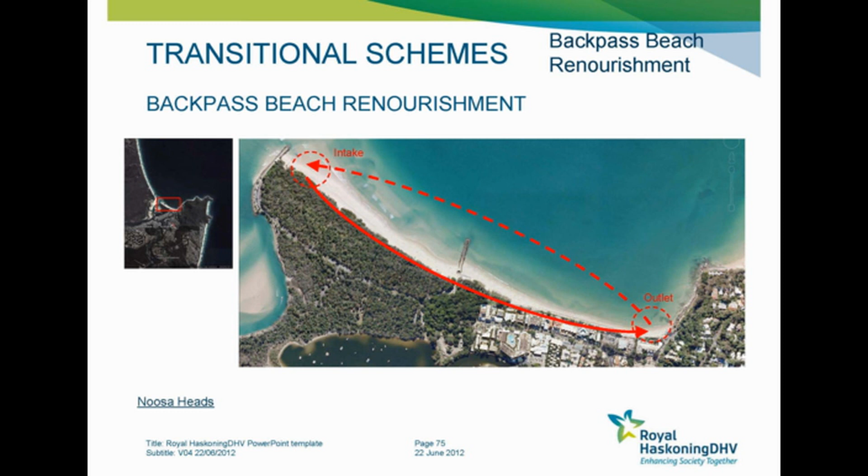Transitional schemes for Collingwood: a recommended Category 1 project is to protect Ilfracombe Avenue with a revetment. Examine a transitional scheme, perhaps a buried toe, for that. If the coastal threat increases, what could we maybe do?

We could look at a backpass scheme at Collingwood out of Moona Moona. Clearly this would need to be investigated to make sure it was sustainable, but it's possible that if we had a transitional revetment scheme operating at Ilfracombe, and some sort of backpass scheme working from Moona, in combination they might assist either from Albion, or we could even take it back up to Susan.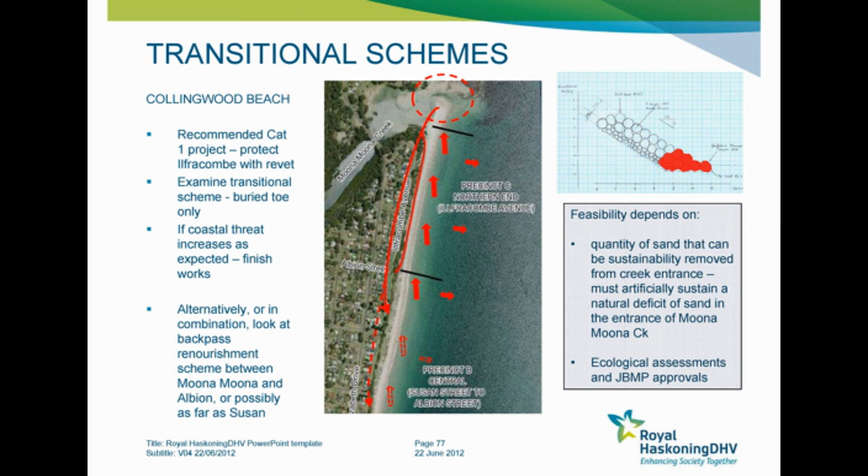Feasibility depends on the quantity of sand that can be sustainably removed from the creek entrance, and clearly the ecological assessments and Jervis Bay Marine Park approvals that would need to be done.

So where to from here? For Collingwood Beach, we've done our DCP work. We didn't find any resistant material. Nonetheless, bedrock investigations, I think, are warranted at all of these beaches just because of the implications of these lines. Here we're talking about actually drilling holes, perhaps at your road heads, even along your cycleway path, and confirming that we don't find anything along the beach.

We can investigate the sustainability of sand recycling, say from Moona Moona. Is there enough sand to reduce coastal erosion risk? Can it be borrowed? What are the ecological implications and approval requirements? Partial placement of a revetment - physical modelling would be a certain requirement.